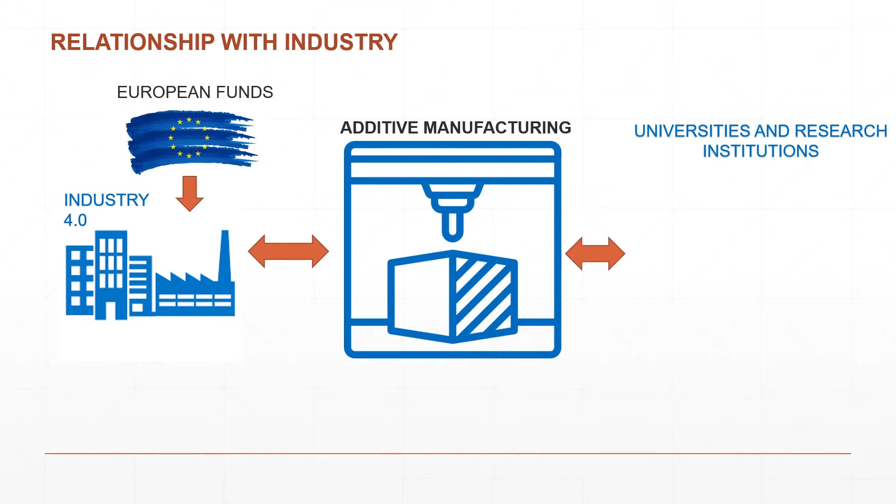Before starting, I want to present the scenario in which this research activity is inserted. Thanks to the funds made available by the European Community, additive manufacturing has become a real link between the industries, the university, and the research institutions. This new technology needed a strong experimental and theoretical support, which consequently produced many literature works.

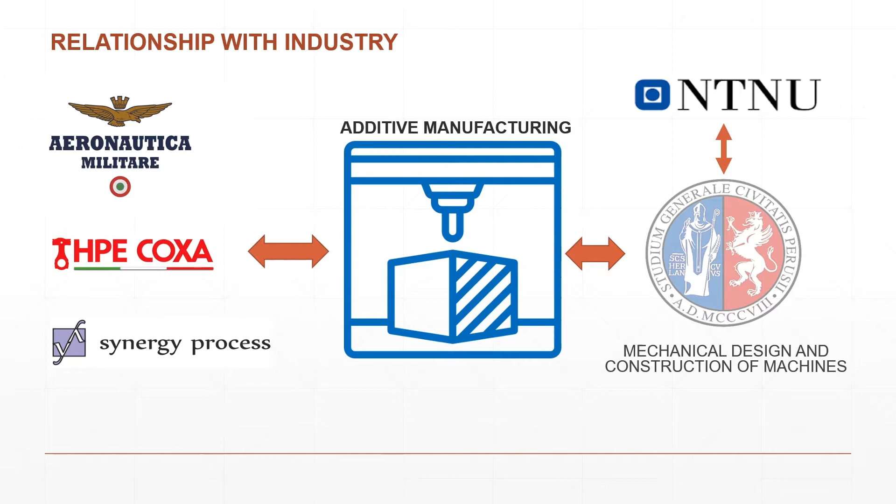I, together with the construction of machine team, are working in support of these issues, in collaboration with the NTNU of Trondheim and with some companies such as HPE Coxa, Synergy Process, or also Aeronautica Militare.

Basically, the real question that the industrial world wanted to answer is: is it really possible to replace structural components? Or better, in other words, at the mechanical resistance level, is it possible to replace a classical manufacturing process with an additive one?

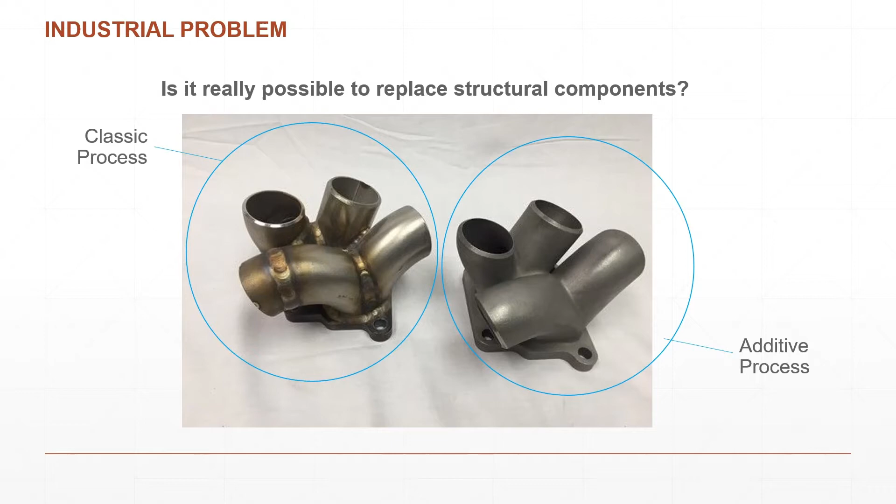This need is mainly due to the fact that there is a lack of a clear and consolidated characterization of the mechanical properties of the final components.

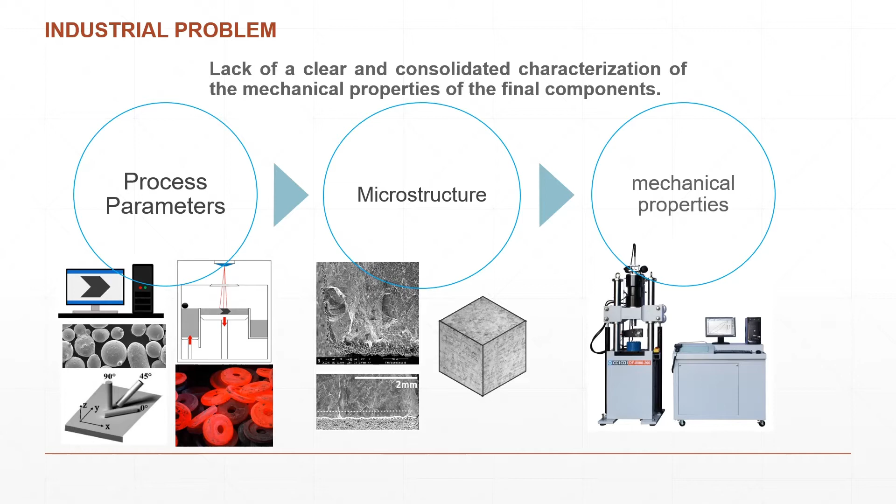These final components are the result of various phases, very closely linked together. We start from the choice of process parameters, which historically was the first research activity carried out in this area.

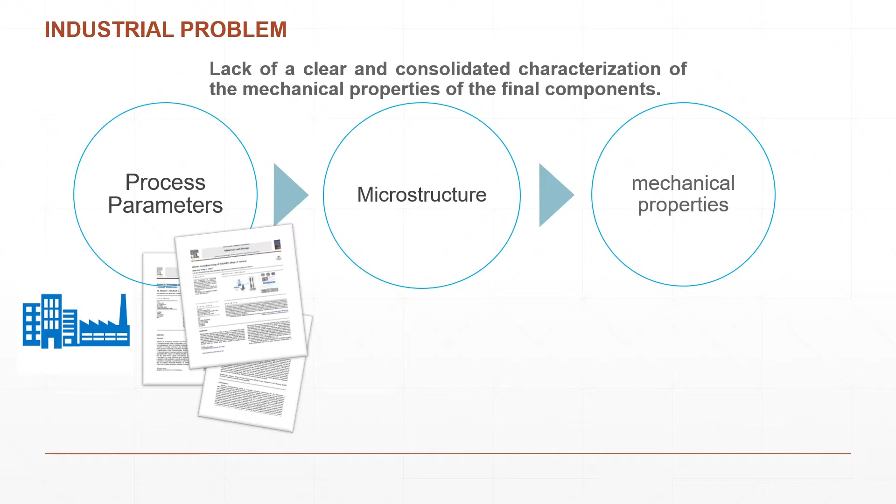Today, the providers of additive manufacturing machines, but also the providers of the powders, already produce and optimize the parameter set that they sometimes give to the industries that book the machines. It's difficult, and requires considerable experience, which in most cases the industry doesn't have, to be able to create a new optimal set of parameters.

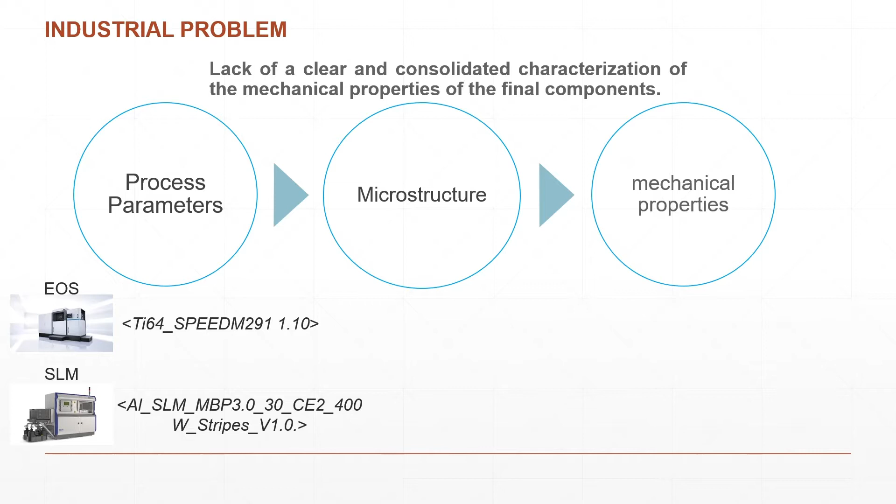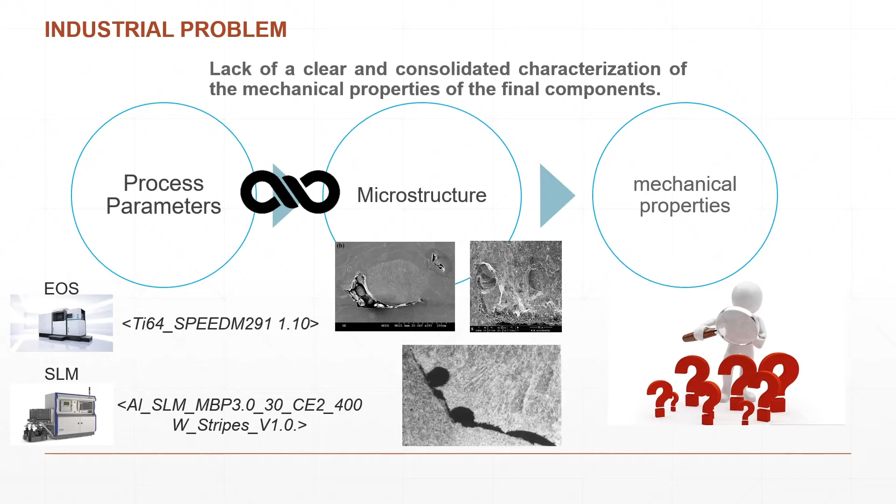The process parameters directly influence the microstructures, but in the end we can ask ourselves, what are the mechanical properties of these components? With mechanical properties I mean all of those fundamental properties for the design phase of any structural component.

So basically the static resistance, the elasticity, so the Young's modulus, and the fatigue limit, or better also the slope of the Wohler curve. The goal is to provide the industry with a valid support for the mechanical characterization of components made by additive manufacturing.

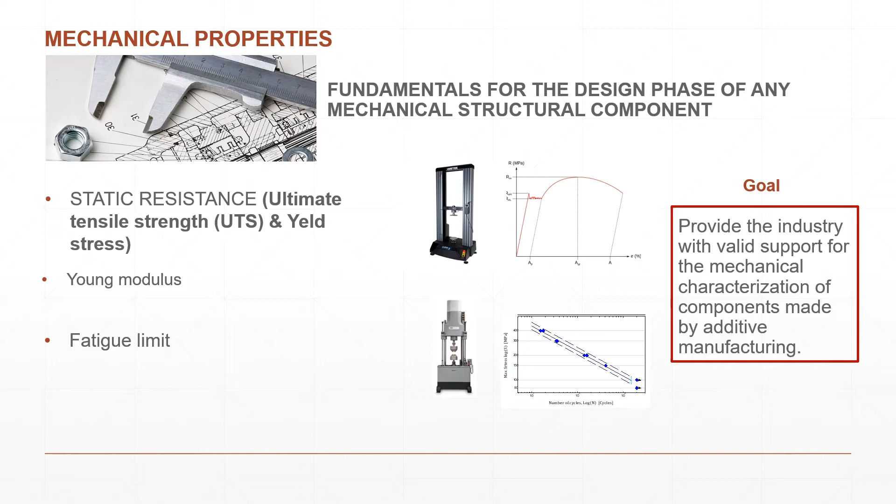We must go on to plan the mechanical characterization tests. First of all, we must define if we want to investigate the dependence of mechanical properties on some variables, and then define the investigation plan, so planning and carrying out the tests.

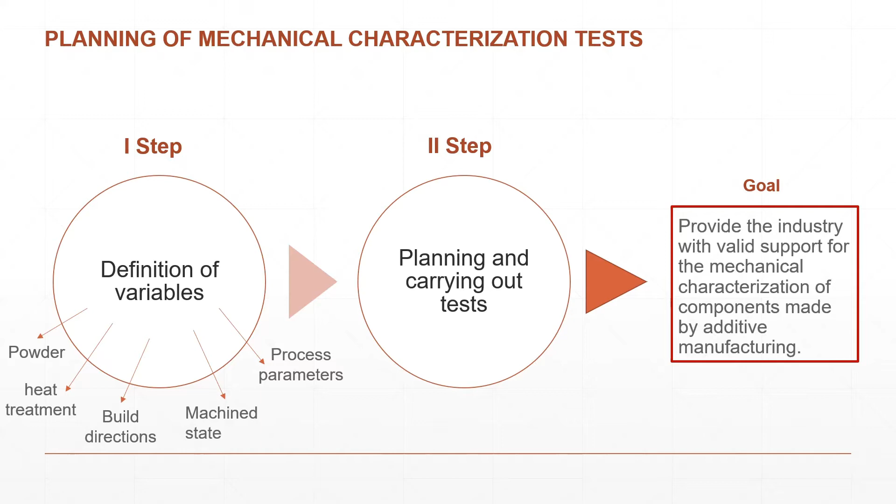If we go into detail on this first step, the definition of these variables, we can evaluate, for example, the mechanical characterization varying the powders or varying some process parameters such as the speed, the power, or some other parameter.

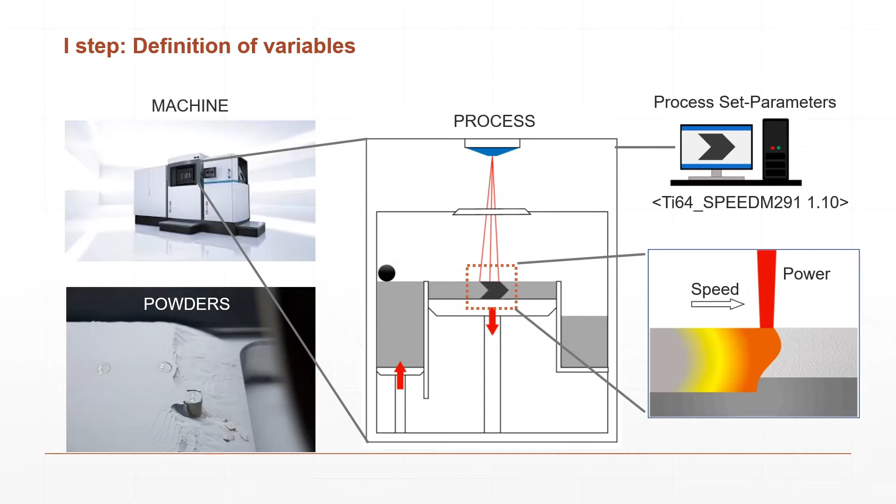Other variables could be, for example, the growth direction, and this is a very important parameter that is linked to the geometry of the specimen.

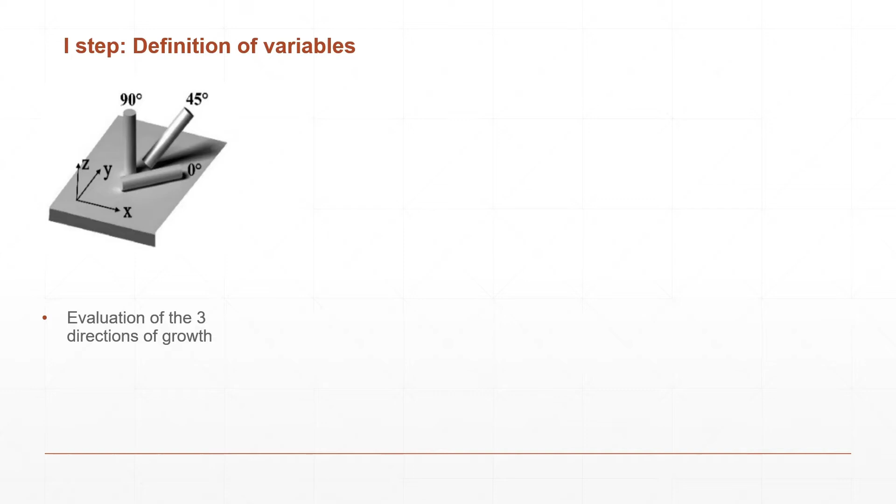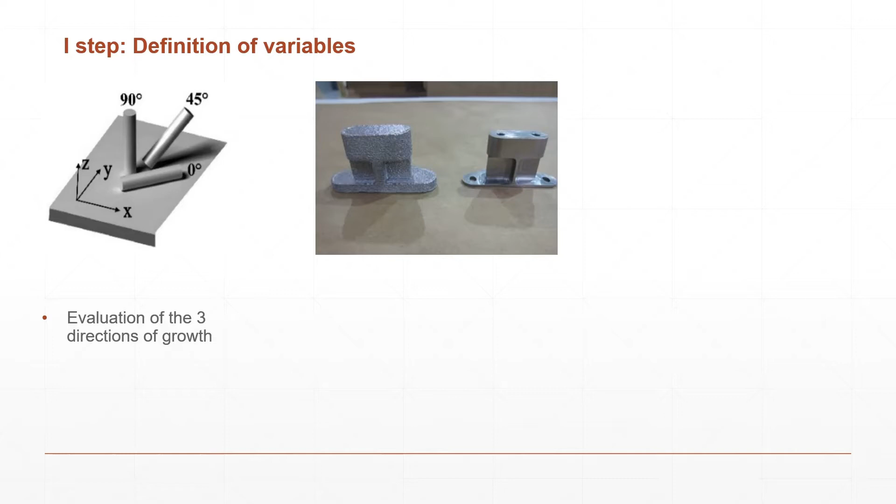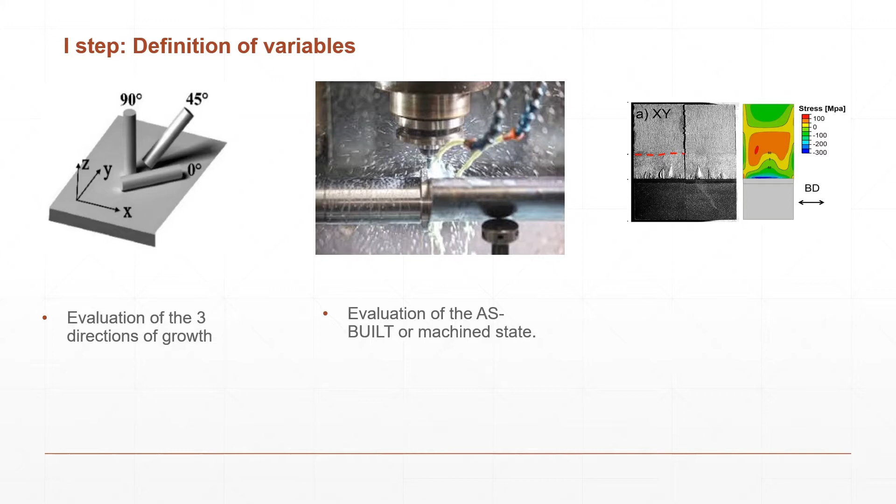Another is whether the component is machined or not, so we can evaluate the as-built state or the machined state. Another could be the evaluation of the heat-treated specimen.

So at the end, also in accordance with the ASTM standard, we can define a table in which all the variability and the adequate number of specimens are contemplated.

For correct experimentation it is necessary to start from the definition of the as-built state. Also, even if the as-built state is not much used in the industrial world, for example with titanium, we know there is usually an additional need for heat treatment.

But we need the as-built mechanical characterization to start, in order to compare it with the other characterizations, varying the other parameters.

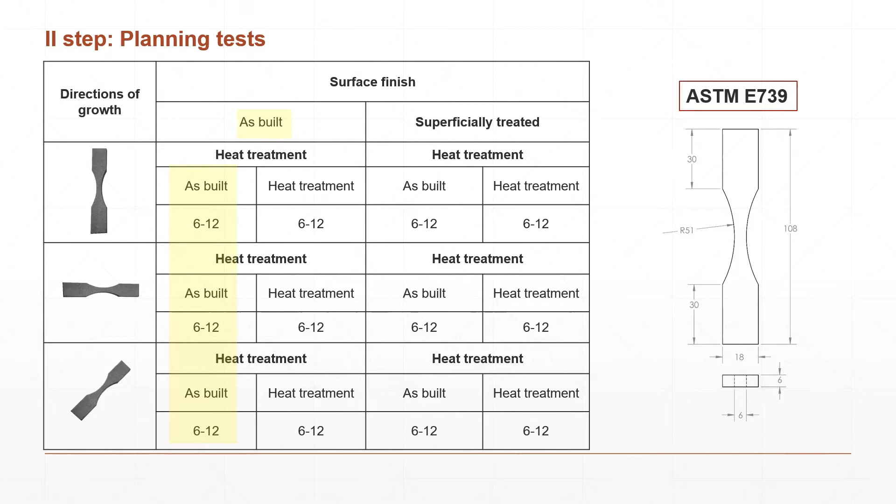Once we have finished planning the test, we can start with the real mechanical characterization, and we start with the static mechanical properties.

In most cases, and I want to stress again that I'm talking at an industrial level, inside an industry this is not carried out, because if you see the material data sheet of the most relevant machine manufacturers...

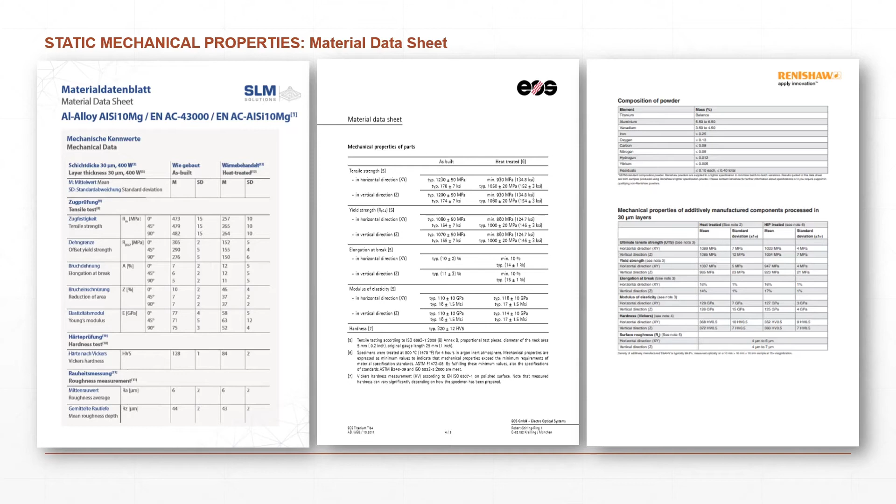...the static characterization is almost always defined. If we go in detail, for example for the SLM solutions, we can see inside this simple datasheet that for a particular set of parameters, the static mechanical properties are defined.

They are defined also for an as-built state, but also for a treated state, and for three build directions.

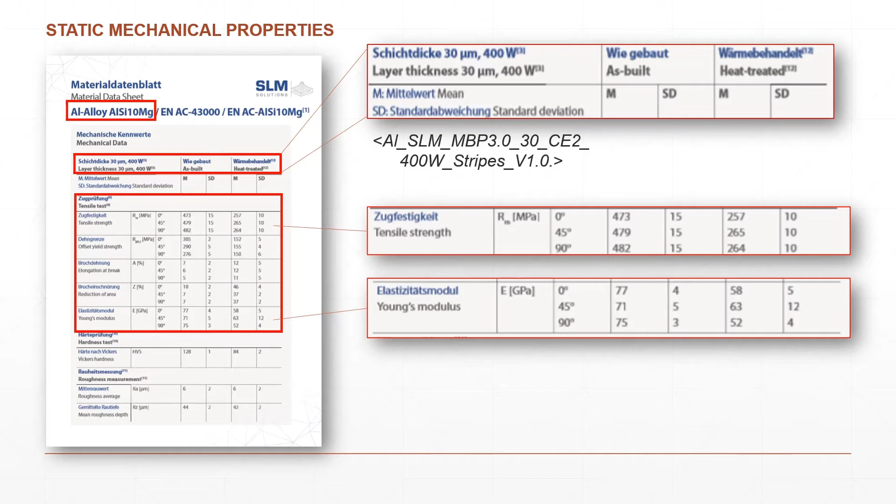What the industries usually want to do is characterize their additive manufacturing for fatigue strength. For example, this is a research activity carried out by our group in collaboration with the NTNU of Trondheim.

on Ti-64 specimens, which are standard titanium powders. The tests are conducted for the Synergy Process company, and the specimens are produced in two building directions and then tested in their as-built state, so no heat treatment.

The detachment from the platform was done using a controlled precision blade, and the supports are also cleaned manually. The tests are done with a load frequency of 20 Hz, load ratio R equal to 0, and we take a run-out when we reach 2 million cycles.

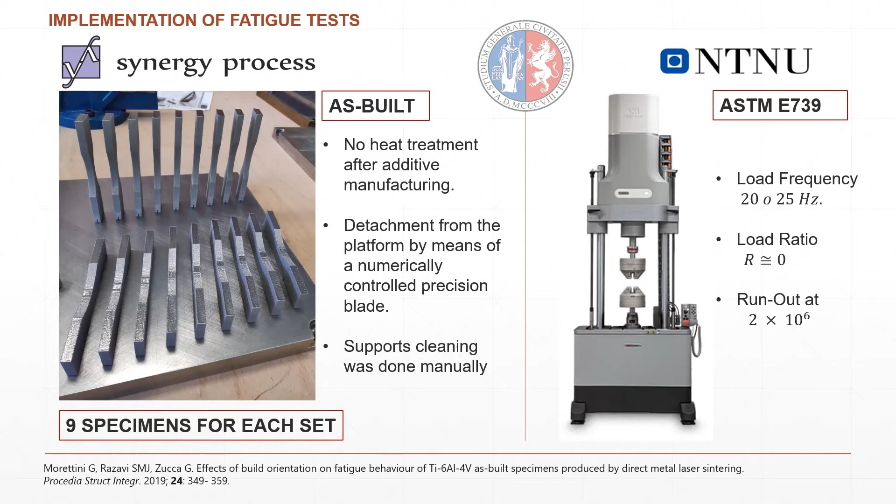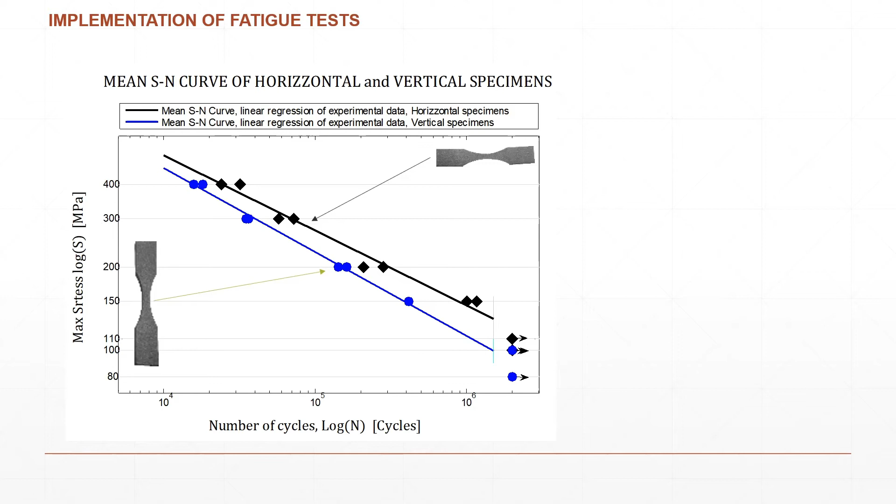9 specimens were tested for each direction of growth, and the Wöhler curves were plotted by performing linear regression for each set. As we can see from the figure, the curve of the vertical specimens is constantly kept below the curve produced by the horizontal specimens.

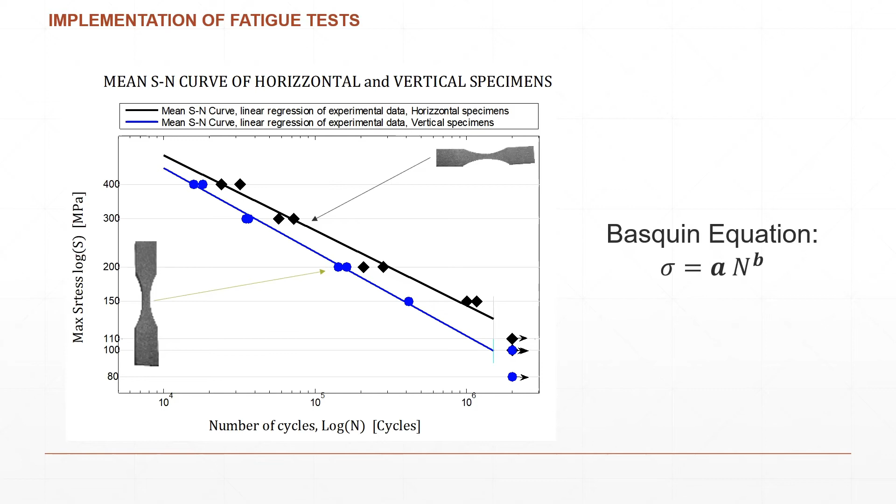The fatigue limit is obviously lower than the classical one that we can find in literature for the Ti-64 produced using classical technology. But let's go through and evaluate in detail what the causes could be.

First of all, the analysis of the surface roughness. We very well know that surface roughness is one of the most influential parameters on fatigue strength. So the surface roughness on the lateral face of the specimens is the same for the vertical and the horizontal one, and is equal to 29 micrometers.

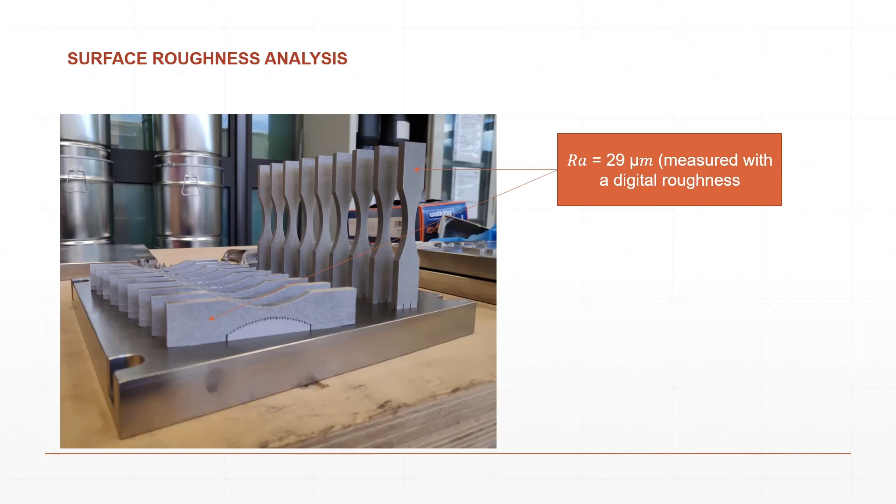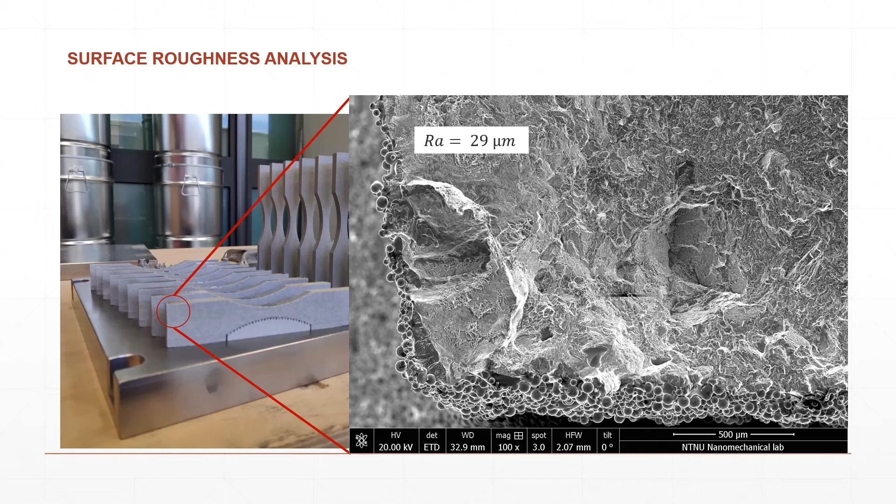The oxidation and adhesion of unfused particles represent one of the factors that determine this value of roughness. If the surface roughness remains constant on all the faces for the vertical specimen, this is not true for the horizontal specimen, because where we cut the supports, the value of the roughness is more elevated.

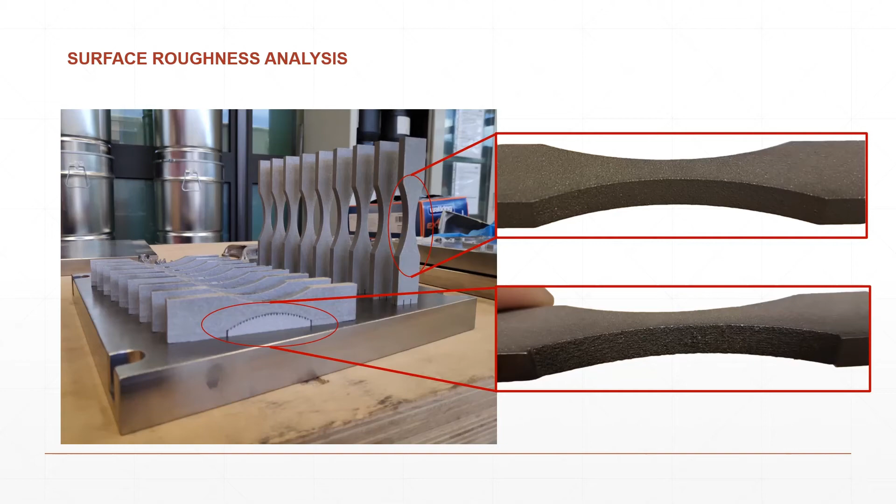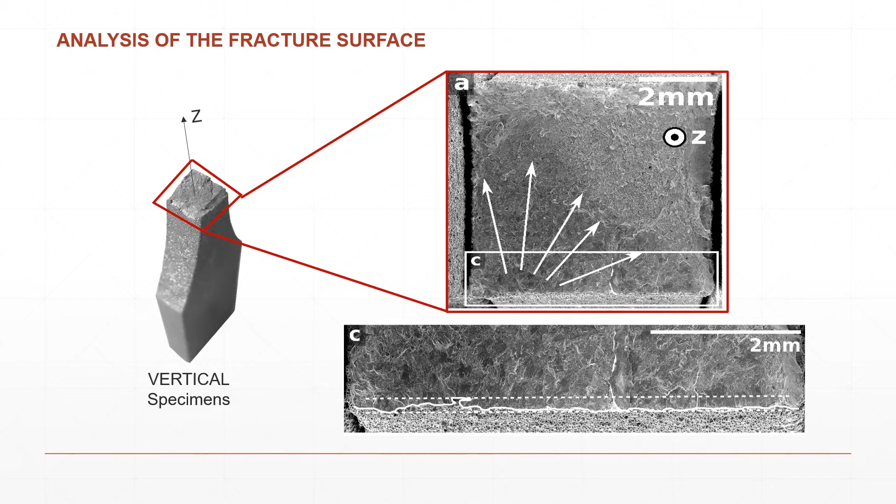But we can go into more detail. We can analyze the fracture surface of the vertical specimens, also for the horizontal specimens. If we compare this analysis, we can see that in all 7 cases analyzed for the vertical specimens, so for all specimens broken, the propagation of the fracture starts from a single point, where the surface has a defect.

But the initiation does not have a preferential side, so the crack can start from all surfaces of the specimen. On the other hand, the horizontal specimens in all 7 cases analyzed have an initiation location with a preferential location. So the propagation of the fracture begins in each case from the side where the support was removed.

In both cases, vertical and horizontal, no internal defects are involved in the propagation of the fracture. The maximum depth of the surface defects obtained from the fractography is 122 micrometers for the vertical specimen and 324 micrometers for the horizontal specimen.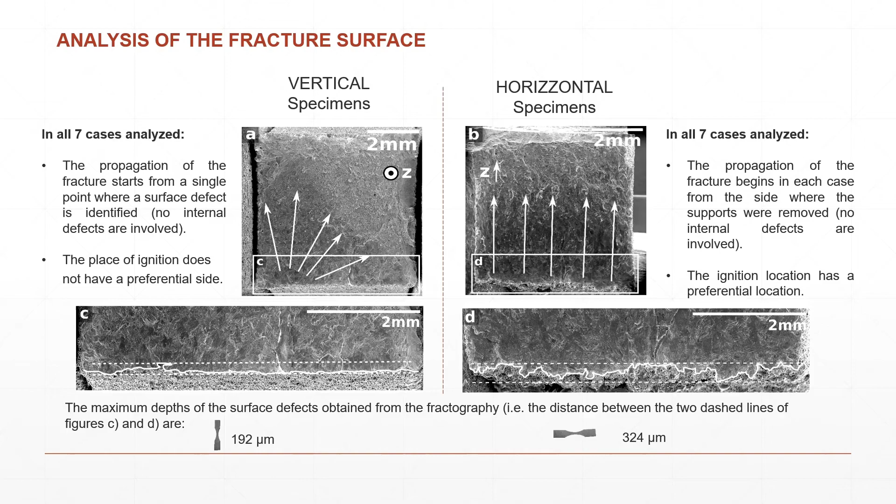Another factor that we have to analyze for its important influence on the fatigue strength is the residual stress. At the end of the fabrication of the specimens, a residual stress was induced. This is due to the high temperatures correlated with a rapid cooling process, characteristic of the additive manufacturing process.

Starting from high temperature peaks, for example in a classic SLM process involving titanium powders, maximum peaks are 2436 degrees. And after that we have a very fast cooling. The rate is in the range of about 10 to the power of 4 to 6, so a very high, very fast cooling.

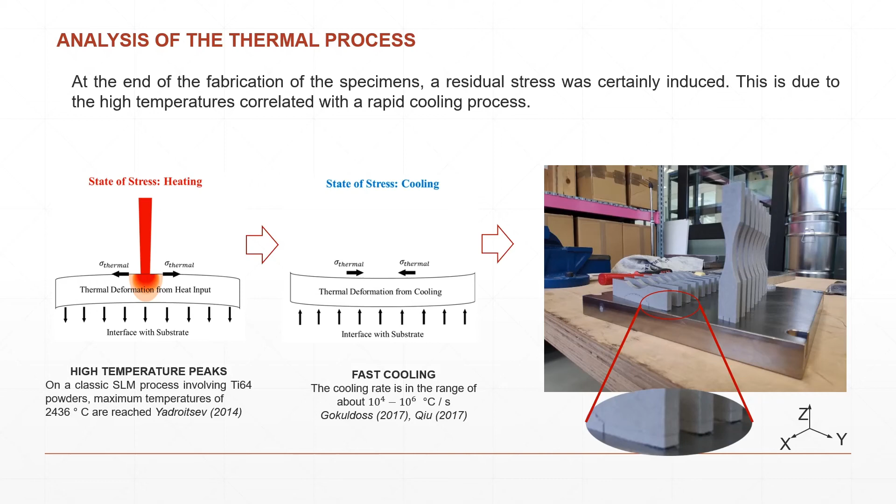And at the end, layer by layer is generating a force capable of creating a detachment from the platform, which is more evident in horizontal specimens. In this case, in fact, we can see the classical banana deformation.

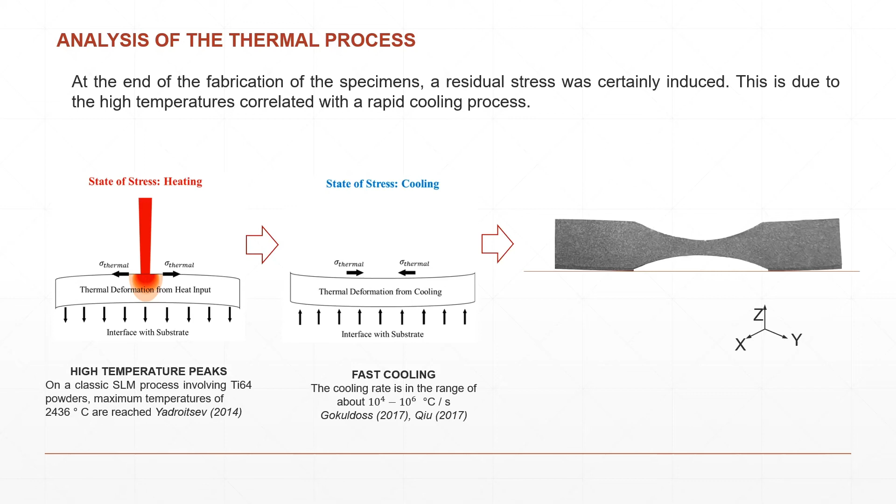It is very difficult to analyze the residual stress to predict it. ANSYS Additive Suite is one of the most powerful simulation tools, and with this we are capable of predicting the residual stress, or better, evaluating also a qualitative and comparative evaluation in terms of normalized vertical displacement, for example.

It's possible to see from the figure that we have a very marked opposition between the peripheral areas and the central area of the specimen. In other words, we have a positive displacement on the peripheral area, and we can arrive also at a negative displacement in the central part of the specimen.

This creates an opposition, so we can analyze also with another slide, in a qualitative way, what is the stress induced inside the specimen. Obviously this situation, but with very low displacement, very low opposition of displacement, occurs also in the vertical specimen.

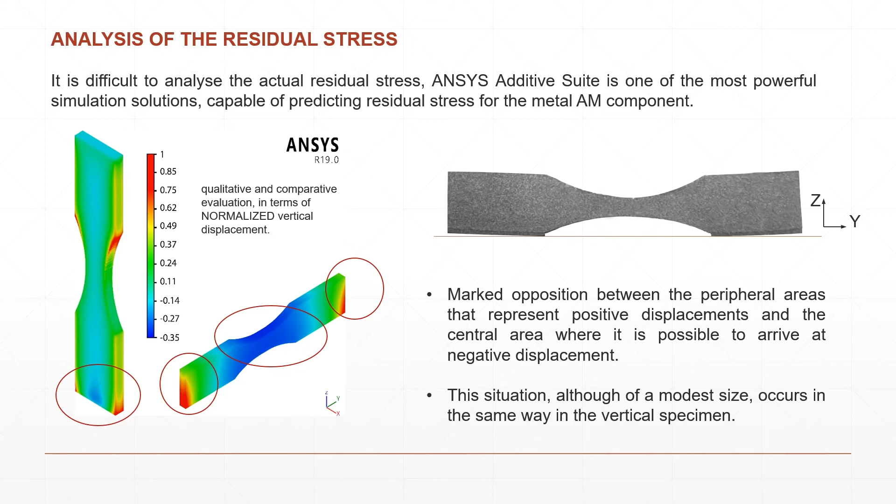As anticipated, we are also going to investigate in more detail the state of stress generated by this deformation inside the horizontal specimens. This deformation creates a particular distribution of stress that is like a bending inside the samples, and this bending obviously has an influence on the fatigue strength.

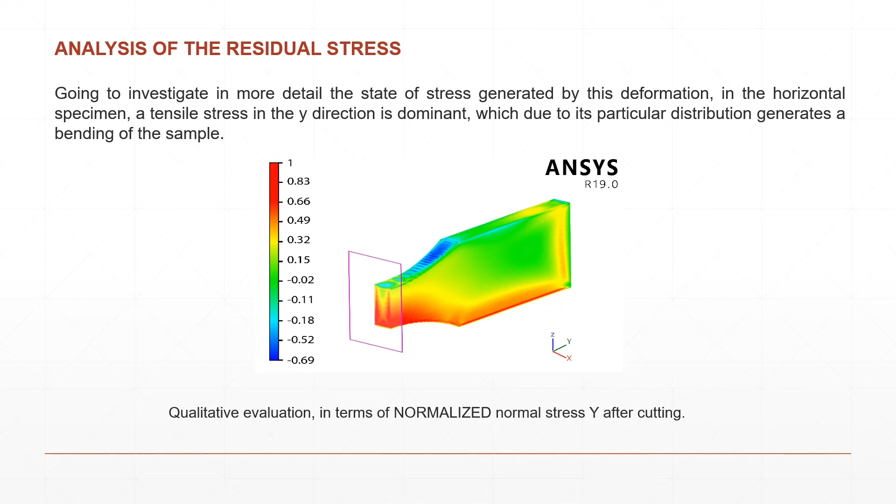Then we arrive at the conclusion. When you want to produce structural additive manufacturing components, you must know the mechanical, static, and dynamic characterization of the material used. For this reason, we have illustrated a simple process flow that a company can use to acquire the basic mechanical properties of their components produced by additive manufacturing technique.

And that can be used at the industrial level. So we stress again that we have seen only the analysis of as-built specimens, but we can also use this same analysis flow to analyze subsequent, for example, heat treatment or some machine treatment, and so on.